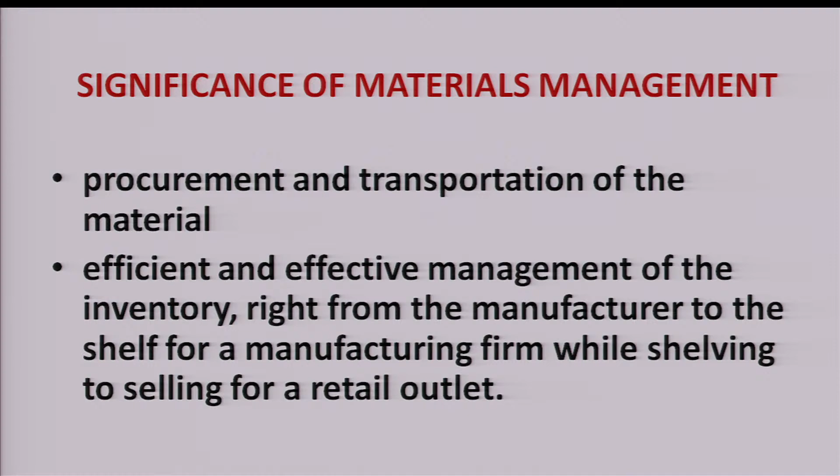So materials management is a sequential, essential process for any manufacturing company or even for the outlet. So what does materials management do? It procures the material or raw material, and provides an efficient, effective management of inventory right from the manufacturer to the shelf, for a manufacturing company or even for the shelf of a retail outlet.

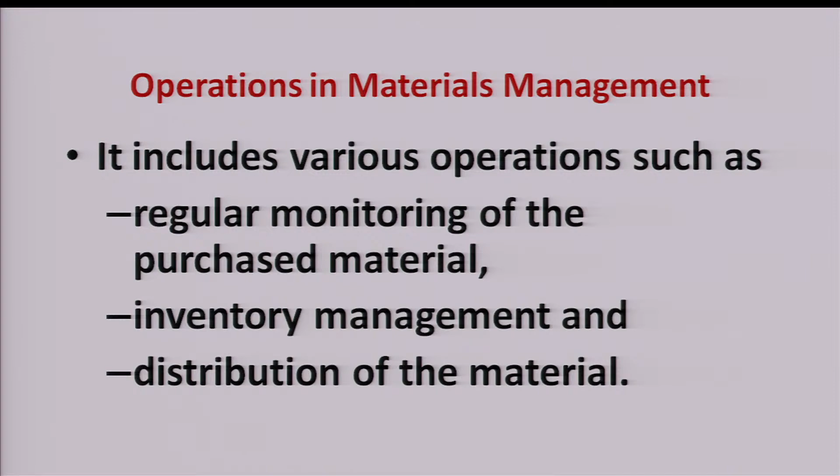So what are the operations in materials management? It includes the regular monitoring of purchased material, proper inventory management, and distribution of material. Distribution of materials means from supplier to manufacturer as raw material, then as a finished product from manufacturer to the dealer. So in all cases, materials management is important.

Now let us concentrate on the process involved in materials management. The first important step is the planning - how you will plan - then organizing, monitoring, implementing and controlling the flow of materials to and fro. So these are the 5 various processes involved in materials management.

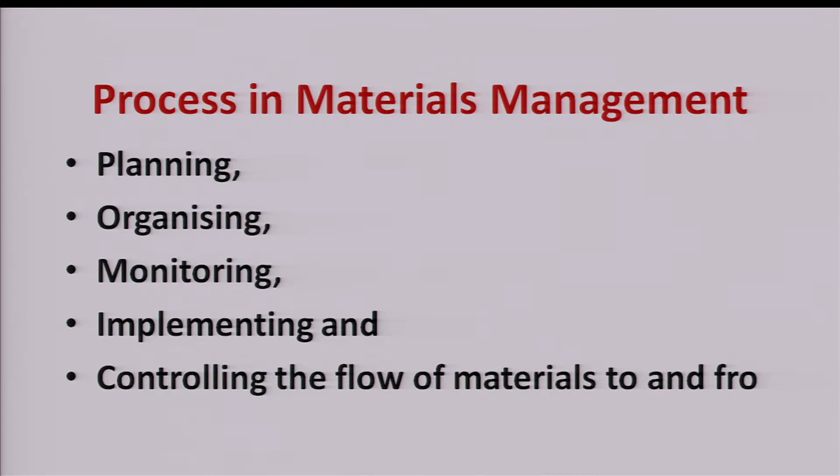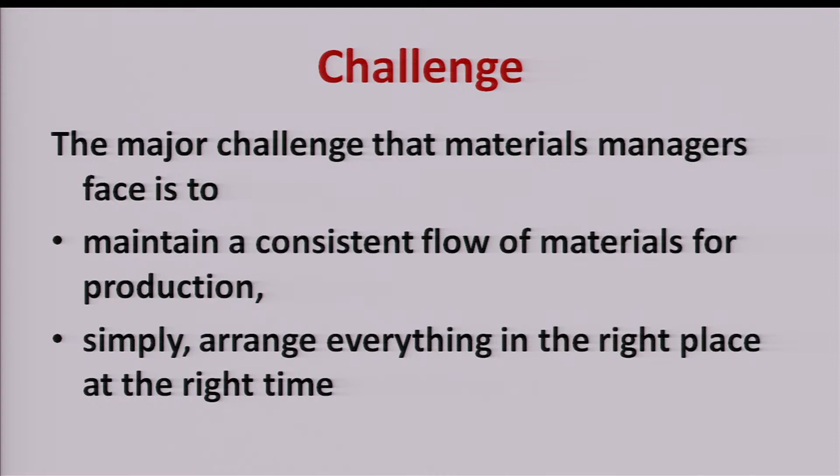Now what are the major challenges in case of materials management? There are a few challenges. The first important challenge is to maintain the consistent flow of materials for smooth production. Another important thing is to simply arrange everything at the right place. These are the 2 major challenges.

Now in every organization we have a materials manager. He or she faces issues like incorrect bills of materials, inaccurate inventory, unreported scrap, shipping and receiving errors, and production reporting errors.

These are the few issues which every materials manager faces. What is happening is that the exact quantity of production is not available to the materials manager. Similarly, the amount of scrap is also not estimated. There are chances of errors in the bills, and chances of errors in the schedule.

Along with this, there is an important issue of uncertainty. There is an uncertainty in the delivery of material, and there is an uncertainty in the production of the product. All these are the major issues before the materials manager.

Now, what should we do so that we must have a proper and efficient materials management? For that, we have to formulate certain policies. To be successful in achieving the objective of materials management by facing the challenges and the issues, we need to lay down certain strong policies.

The first one is the supplier's quality and reliability policy, order process perfection policy, inventory analysis policy, cost saving policy, and the timing policy. We will take them one by one.

So first we will see what is the supplier quality and reliability policy. To provide a consistent quality and regular flow, our supplier should be efficient and reliable, because there are some adverse situations where there is an obstruction in the continuity of supplies, and the company will not be able to meet the demands of the customer. Sometimes it becomes impossible for a company to directly deliver the required quantity of products to the customer on time if they fail to obtain quality suppliers.

So the important point here is supplier quality. It is a very crucial role for suppliers to fill the company's order on time as agreed upon the lead time, so that the company should be able to meet customer demand without compromising on quality.

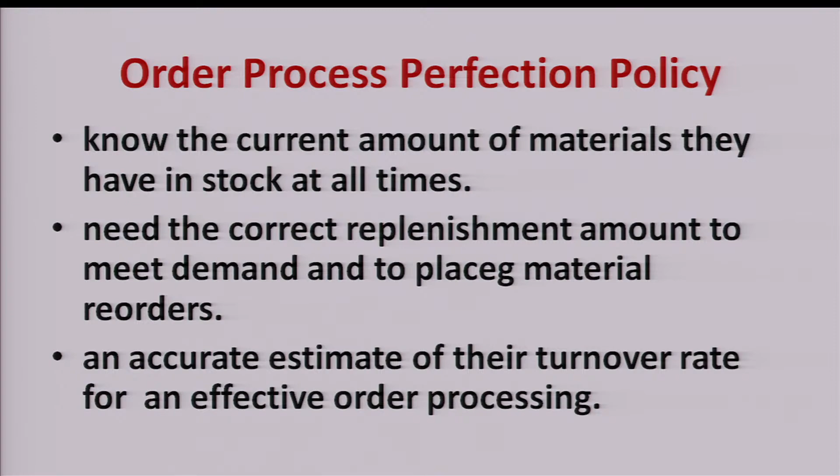Few other important points also come under the order process perfection policy. It basically means understanding the current amount of materials stocked at all times. It is also required to have correct replenishment to meet the demand when placing material orders, along with an accurate estimate of turnover rate, so that our order processing is effective.

The third policy is the inventory analysis policy. It is an essential step for any materials manager to regularly analyze the inventory at his workshop or organization, such as the inventory turnover ratio and other financial performance. Here we have a term, inventory turnover ratio. So what does it mean when we say the inventory turnover ratio is 5? That means the company can sell and replace its stock of goods 5 times in a year.

This policy helps to understand how to fill customer orders while keeping inventory cost low, and it also provides tips, formulas and key metrics for analyzing the company's inventory. It further exploits an effective inventory system so that an account of total purchase as well as sale of every item can be maintained. It also ensures the cost of purchasing an item should be less than its sale.